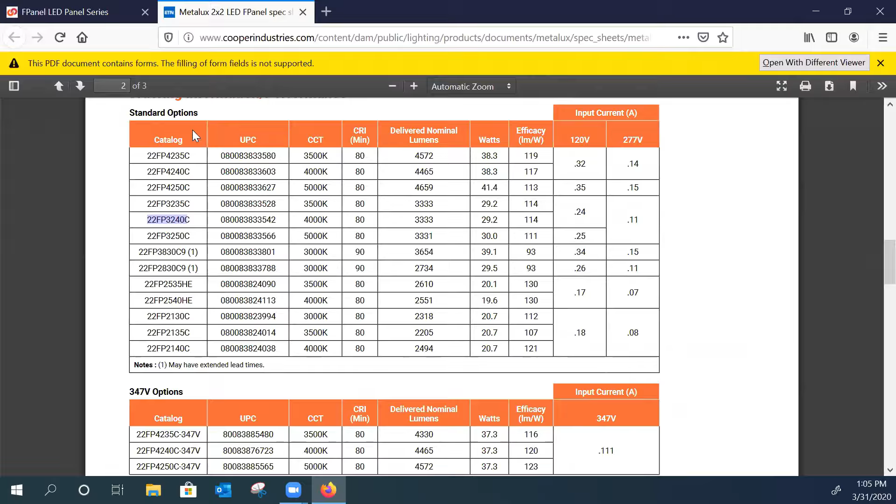So for today's purposes, we're going to do a layout utilizing the 22FP4240C, which is a 4,200 lumen, 4,000 Kelvin fixture. And then we'll also use the 3240C, which is a 3,200 lumen, 4,000 Kelvin. So I know what fixture I want to use. I'm going to go back to my fixture page, and I'm going to select the IES files.

So within this screen, this is going to be the same for any interior fixture as well. It's going to break down IES files by 1x4, 2x2, 2x4, and then ones with emergency. But if you notice, anything here that has a blue part is a link. Do not click on that. It's not going to hurt anything if you do, but it's going to open up the IES file in a text document that looks like this. If you're using Visual or AGI32, you could click and drag this link into that program. But we're not doing that.

So instead, anything that has a little calculator next to it, we're going to put a checkbox next to the fixture that we want to do the layout with. So going back to our spec sheet, we have the 22FP3240C and the 22FP4240C. So I'm going to click those, 3240C, 4240C. Again, you could select 1, 2, 3, 4, it doesn't matter. We're just going to select these two for comparison's sake.

So what you want to do is scroll all the way down to the bottom of the page, and there's this link here that says calculate the selected files. So I'm going to click that. That is opening a new screen on my computer.

And if someone could just type in the chat box and let me know that you see this thing that says Luxiflux Zonal, that would be awesome.

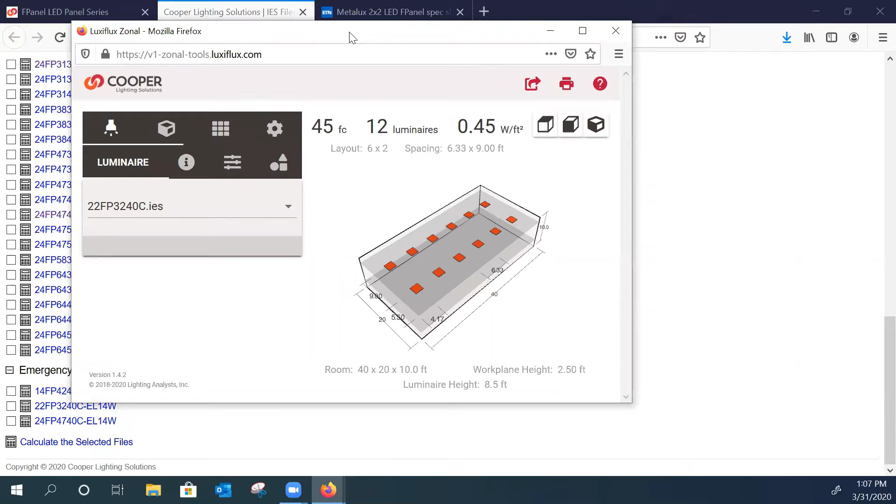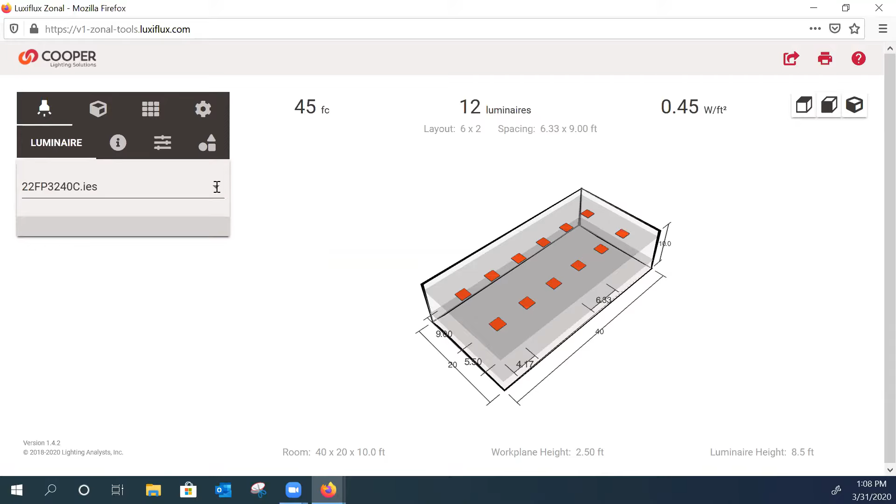So from this point, whenever we've selected those two files, this new window will pop up here. The IES file calculator is up now. Okay, so in this section, very quickly, we're going to run through left to right on the settings. The first button here is our luminaire, and here's where we can pick which IES file or which fixture we're going to use. We'll start with the 3240C. So that's telling us which file we're using.

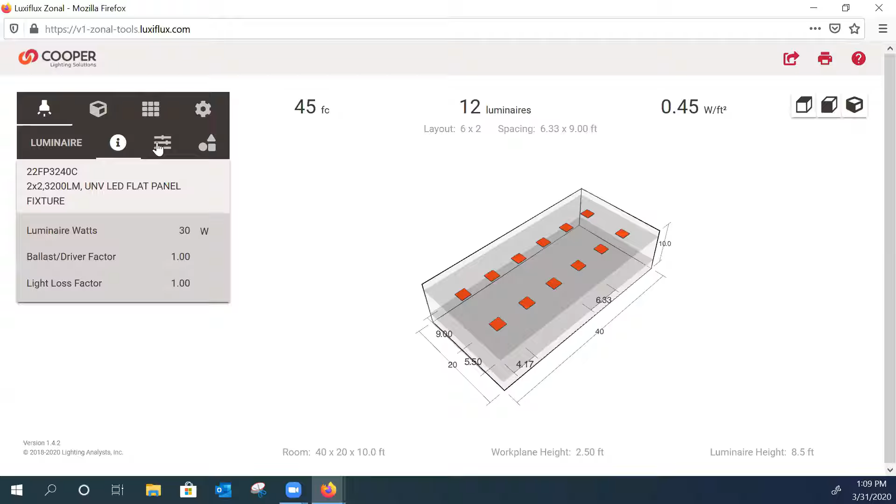The info button here is going to tell us about that fixture. It's 30 watts, it's 3,200 lumens, it's a 2x2, all that good stuff. The third button over here we're going to select, and this is our proration factor, also known as a light loss factor. We want to change that to a 0.9, and we want to use that for interior and exterior fixtures with Cooper. So changing that to a 0.9 gives us what we call a maintained foot candle level, not just your initial out-of-the-box foot candle level. So this is going to be your foot candle level over time, not brand new when you hang it up. So that's important.

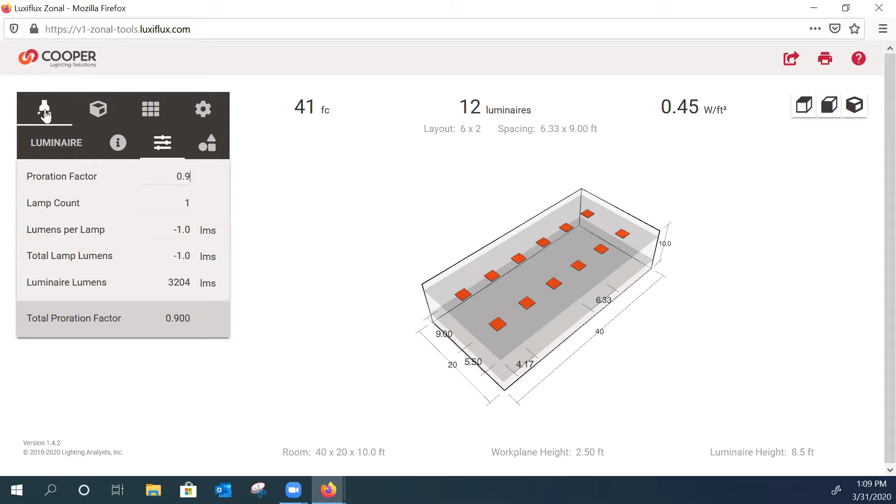So we've covered everything. The last button here for Luminaire is just going to be where we can change the shape of it if we wanted to. You could technically make it round, but we're going to leave it square. So next button up here is going to be a picture of a box, and here's where we designate our room size. By default, it's 40 by 20 by 10. We will make it, say, 30 by 30. We'll make a square. Now, one thing to note with this program, you can only do squares or rectangles. You cannot do L-shaped rooms or any weird shaped rooms. And it's just to give us a quick calculation of the estimated foot candles.

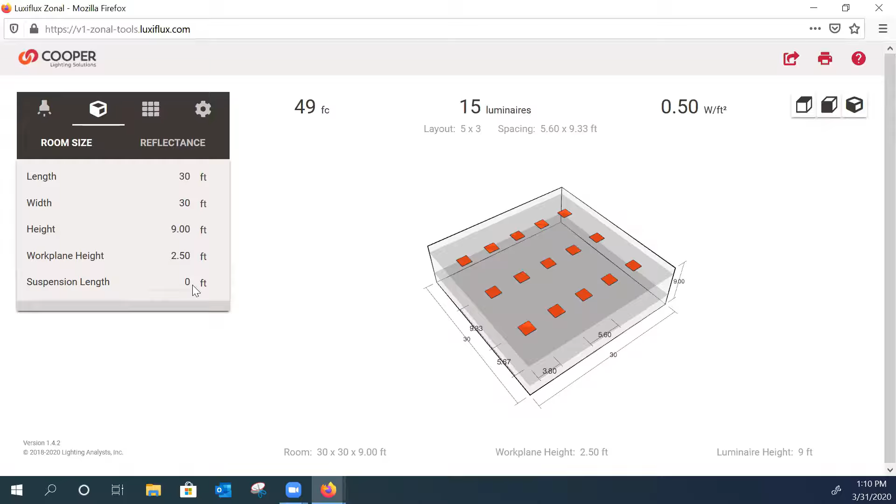So 30 by 30, the height is at 10 foot. I'm going to go ahead and make that 9 foot, which seems to be a pretty common height for an office. Work plane height here is going to determine where the foot candles are calculated. So if you were doing a gymnasium, you may want to put it at the floor. But for our purposes, we'll call this an office. We're going to put it at 2.5 foot, which is your common desk height. And then suspension length, if you were doing a high bay, maybe you put your ceiling at 30 feet and suspend the fixtures down 1.5 feet. But since we're recessed into the ceiling, we're going to put our suspension length at 0. So now if we look over here, our fixtures are actually recessed into the ceiling.

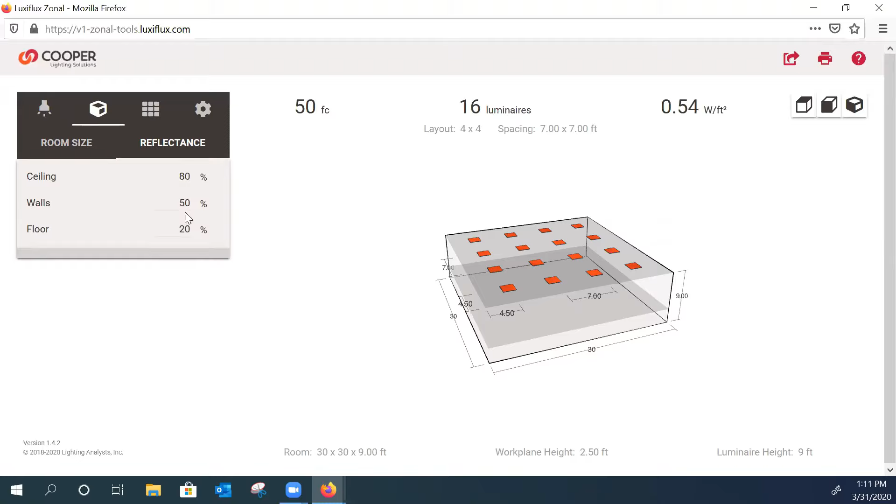Okay. Next, we'll go to the Reflectance tab. Again, we're just working our way left to right, and then left to right within each tab. So Reflectance, here's where we specify the reflectance of the room. If it is a typical office, 80, 50, 20 is kind of your default. This is a percentage of 0 to 100. So 100 is the brightest white that you have available, and 0 would be the darkest dark, completely black. So for this purpose, we're going to use 80, 50, 20 as it's defaulted. If you had a gymnasium with dark walls or a dark ceiling, maybe you reduce this to 60 and 30. Or if you had a really dirty warehouse, maybe you reduce it as well. So that's reflectance. We're still on the second box here, room size and reflectance.

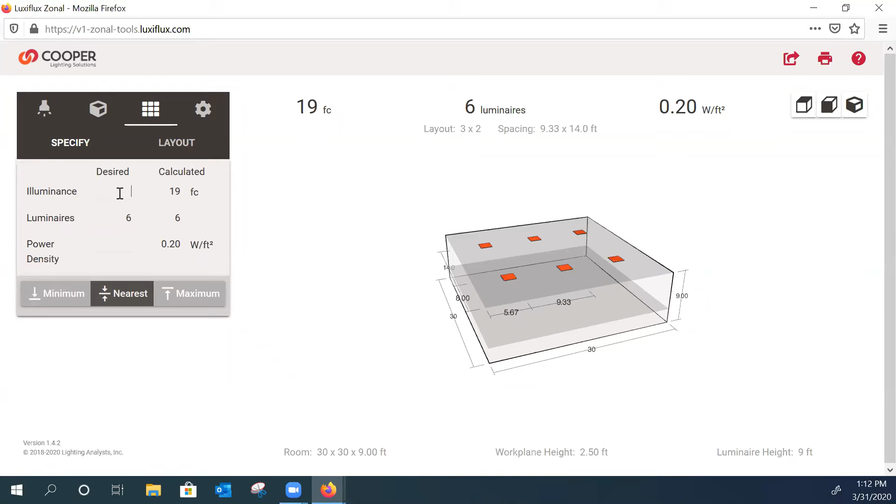Now the third button here is going to give us some options where we specify. Under specify, we can say how many foot candles we want, how many fixtures we want, or how many watts per square foot we want. We'll go with fixtures. Currently it's showing 16 fixtures is going to get us an average of 50 foot candles, but I'm going to change that to 8 fixtures. If you change it, it's going to make it the closest even or odd number of fixtures that are evenly spaced in the room. So this is showing us 9 fixtures is going to give us 28 foot candles. If we go to 6, we get 19 foot candles. So anytime we change one of these numbers, it's going to change the calculation on the right. So for now, for an office, let's say we want a 50 foot candle average. We're going to do that.

It's telling us we need 20 fixtures and it's 0.67 watts per square foot. Now here we're specifying, we say we want 50 foot candles either minimum, closest to 50 foot candles, or maximum. So right now 50 foot candle minimum, but if we hit 50 foot candle maximum, it's going to change the number of fixtures as well. Tell us, okay, the maximum foot candle levels in that space is 50 at that point. I typically leave it on minimum unless otherwise specified.

Okay, and then layout, which is the second little tab underneath the room here, underneath the specified tab, you can now change your layout. If you want to do, instead of 5 columns of 4, you could do 4 columns of 5, which is ultimately however you want to lay it out. You can also change, say 6 columns of 3, it's going to automatically change your foot candle levels here when you do that.

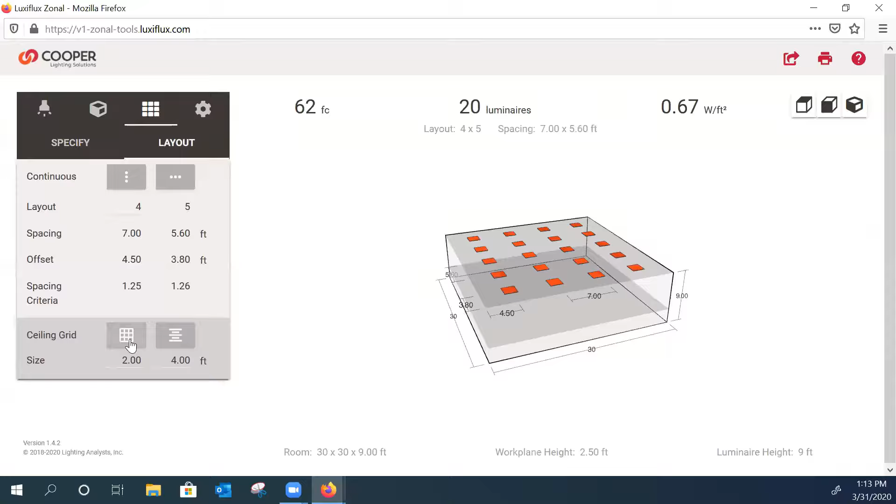So at any rate, we're going to leave 4 columns of 5, and we can also apply a ceiling grid if you wanted to. If you notice over here, it'll then center things in the grid. You could also center the grid on the wall. You could just take out the grid, center the fixtures, so on and so forth. Give you some optical differences there.

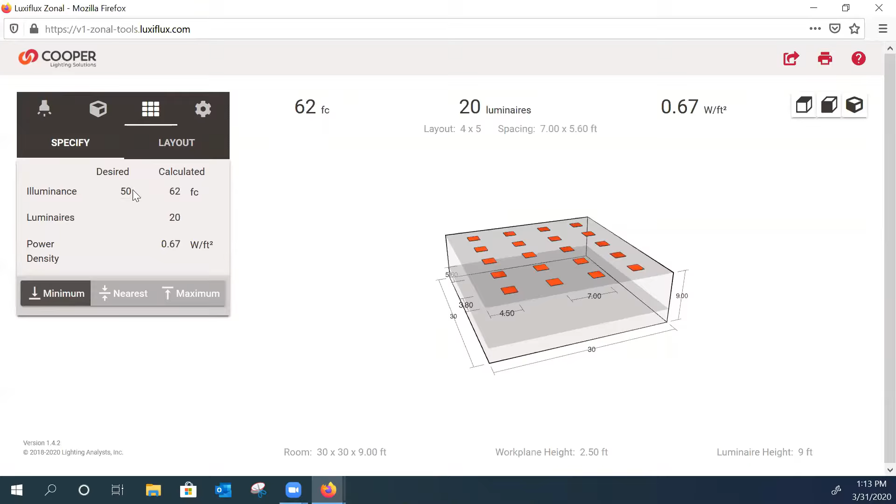One thing to note, your foot candle levels do not change. Your averages here do not change if you change your layout. So if we did 20 fixtures and we were going to do 20 in a row, 20 by 1, while it looks really bad, our foot candle average should stay the same. So we'll go ahead and go back to 5 rows of 4. So with that being said, again, we specified 50 foot candles minimum. It gives us 62. Here's our layout, 5 rows of 4. We can modify and change that.

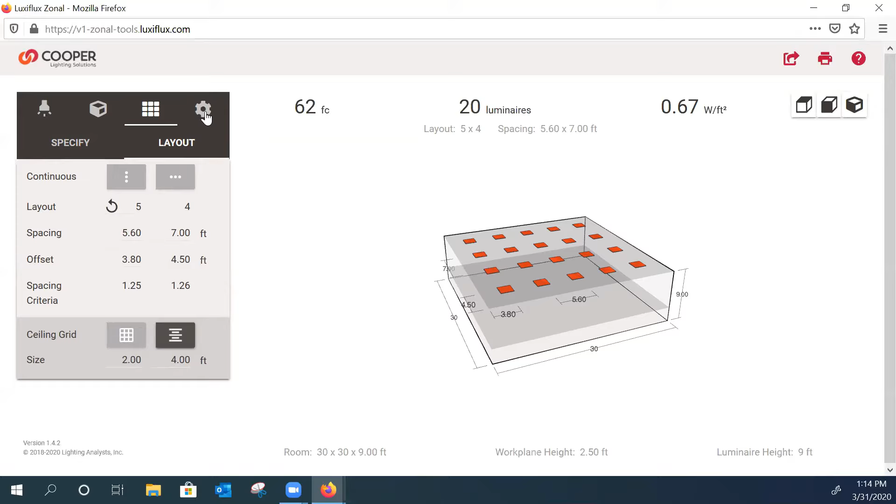The last thing to go to would be your settings here. And this is where you can change your distance from feet to meters. You can change your illuminance from foot candles to lux, or you could change your power density from watts per square foot to watts per meter squared.

Cool, so now that we've got that, a couple things I want to mention over here on the right-hand side. You have the ability to click your mouse and hold and turn this to whatever direction you'd like to view it at. You also have some presets here, which would be plan view, elevation view, and isometric. So with that being said, let me go back here real quick. So currently with this fixture we have chosen, we are at 62 foot candles.

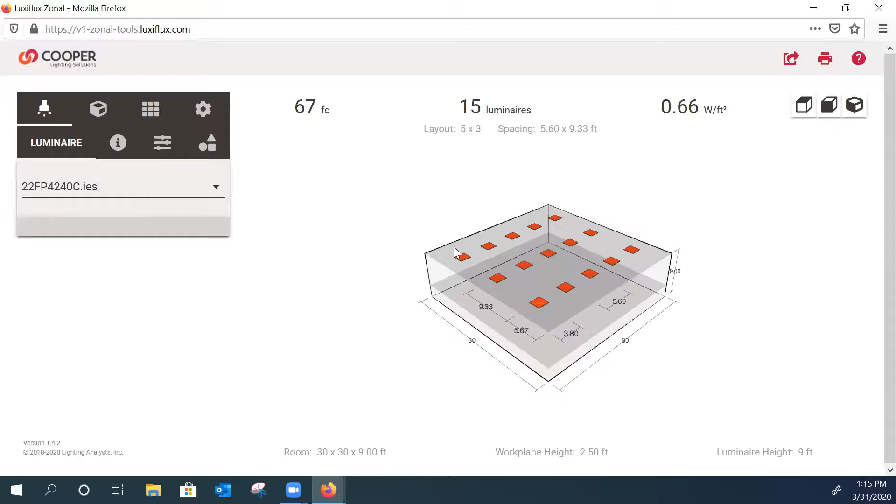There's 20 fixtures. Now if we go back here to our fixture at the top, go to luminaire, we can now change that to a different output if we like. So we'll switch it to the 4200 lumen just to see the difference. And when I do that, look over here on the right and just watch the changes there. So we'll change it to the 4200 lumen. And now to get a little bit brighter but close to the same foot candle levels, it's only going to take 15 fixtures. So you can toggle back and forth between 3200 lumen and 4200 lumens and decide which one you like best.

Then our last step is going to be to print this. You cannot save this within this program, and once I close this, it'll be gone. We'd have to start over from the beginning. So instead, you could hit share. Here you can email it to yourself or someone else.

The other thing I usually do is I go to print, and then here you can edit the information. So I can say Bill's office. I can type see plan, blah, blah, blah. All these fields are editable. So this is giving us all the information we just looked at on the previous screen. Luminaire watts, total number of lumens, size of the room, reflectance of the room, layout of the room.

And then it's also giving us up here at the top our average foot candles, our number of fixtures and our watts per square foot. Here on the right-hand side, you can click these same boxes.

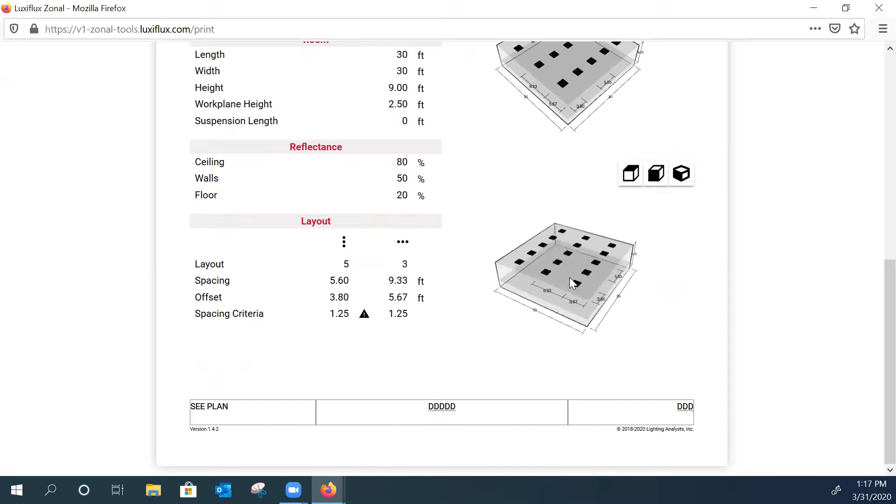So you can show plan view, elevation view, or isometric view on any one of these. Let's scroll down a little bit. You can also click and hold and rotate however you want as well. So once we've got it how we like it, then we just go to print, and that's going to open up a print dialog box for your PDF printer, or however you're going to print it, whether it's paper, PDF, whatever the case may be.

Now I'm going to go to exterior, and again, with exterior fixtures, I know the fixture I want to use, which is the Lumark Axcent wall pack. So I'm going to click on Lumark. I'm going to now find which fixture I want to use, which in this case I'm going to go to wall mount, and then the Axcent LED wall mount. You could do this with any of these fixtures.

Again, this page layout is the same as the interior. Tells us all the great things about the Axcent fixture. Tells us all the description of the fixture. We've got spec sheets here. We've got IES files, brochures.

By the way, for those who are on the line that are distributors or contractors, if you're looking for install instructions and for some reason you swear they weren't in the box and the box got thrown out, you can usually find any install instructions under technical information on the product page. Okay, so spec sheets, I'm going to pull up the Axcent spec sheet.

And again, because I want to figure out which fixture I'm going to use, I'm going to scroll down here to the bottom, and this gives me all my wattages, whether it's refractive lens or full cutoff, and all the good information. So we'll go here to our IES files for the small. So here we've got 1A, 2A, 3A, 4A, 5A. 6 is not on this page, so we'll compare the 4 and the 5. So I'm going to pick AXCS 4A and AXCS 5A. And I'm going to scroll to the bottom, hit Calculate Selected Files.

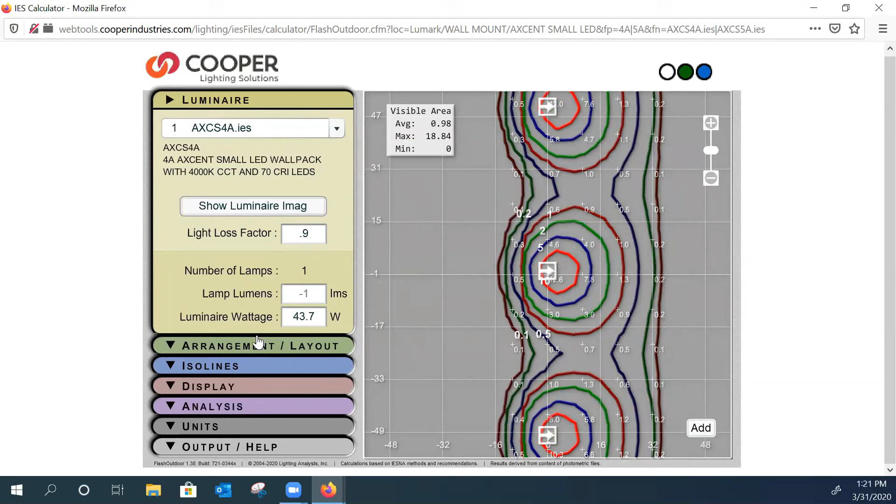Our next option here is arrangement and layout. Usually what I do is I start with a single fixture, just one fixture out on its own, because this is how we're going to be able to tell very quickly how much light this fixture puts out and where. So column 1, row 1, single fixture. Don't worry about spacing because we've only got one. We'll come back to that. Mounting height, let's just say this is over a man door at 12 feet. So we'll use that for comparison's sake.

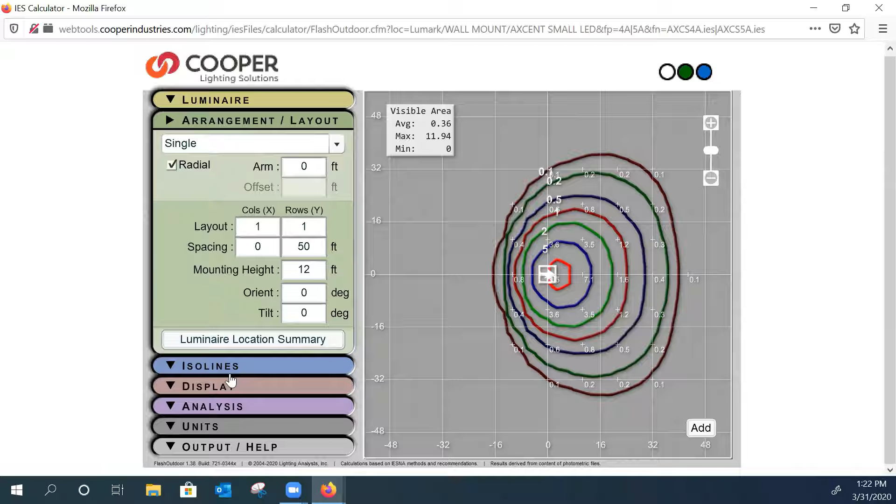So if we look here, this is the optical distribution of this fixture. All these lines represent a foot candle level. If you hover over them, it'll tell you 10 foot candles, 5 foot candles, so on and so forth. So what I'm going to do is go to those isolines, and I'm going to uncheck everything but that 0.5. And 0.5 is your typical recommended foot candle level for an exterior project from, again, a safety and security minimum foot candle level.

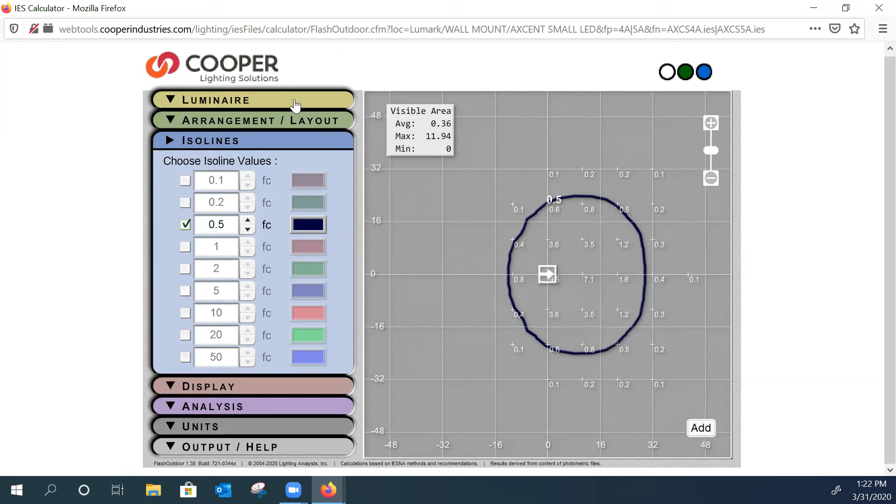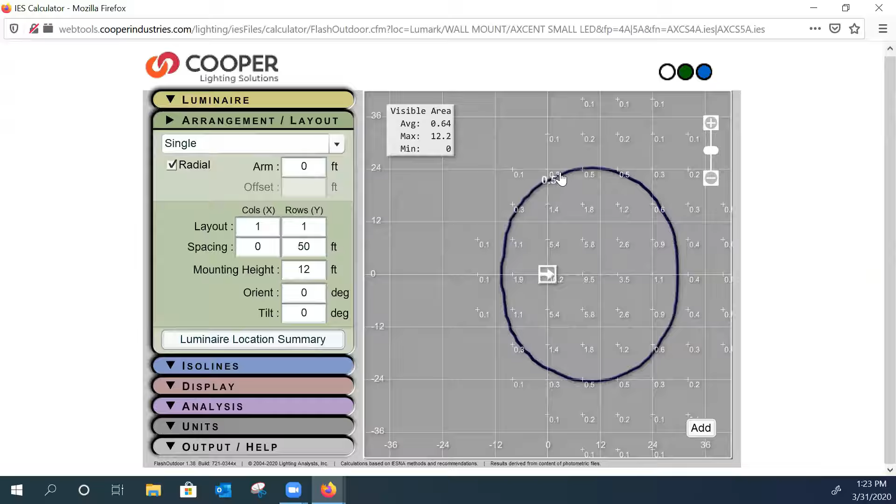So what I'm looking at right here is the fixture mounted at 12 feet, which is where we had it. I have a 1/2 foot candle right here. And judging by the spacing of these squares, and if you notice there's a scale here on the left, if I use my scroll ball on my mouse, it'll zoom in or zoom out, and it makes those boxes bigger or smaller. So this is a 12-foot square.

So just a quick glance is showing me, okay, this fixture at 12-foot mounting height is 12, 24, 30-something feet of forward throw. We'll talk about changing this scale here in a second. So 1/2 foot candle minimum is what I'm showing here, and here's my scale.

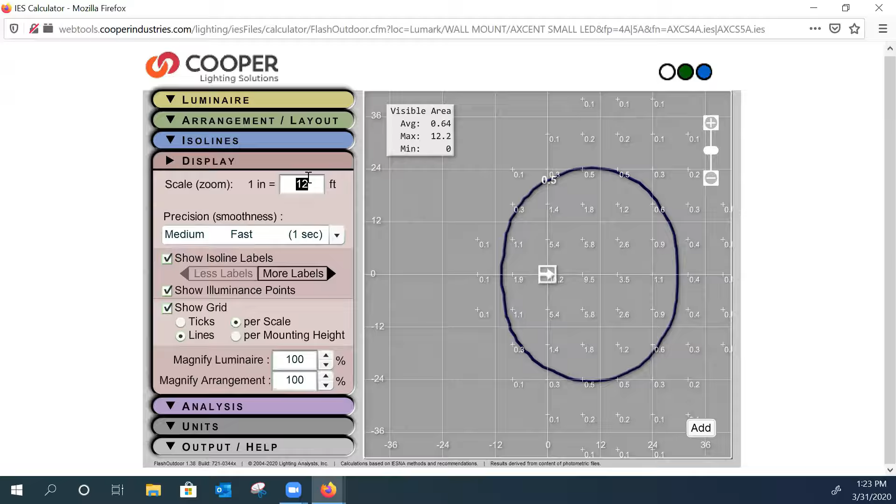Now, if I go down to display, my scale, here's an easier way to do it. My scale is at 1 inch equals 12 feet. I'm going to make it 1 inch equals 20 feet. So this is showing me at about 30 feet, I've got 1/2 foot candle. I'm going to leave it at that scale because it's easy for me to read.

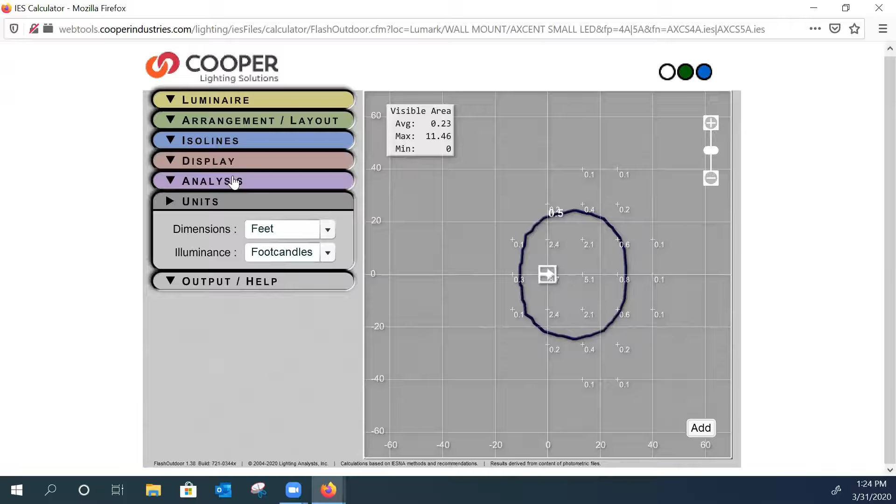We can go to analysis, and this is going to tell you your statistical areas, your average, your max to mins, all that good stuff. And then again, units would be feet and foot candle versus meters and lux if you want to change that. So that's giving us the quick calculation of our exterior fixture mounted on the wall at 12 feet.

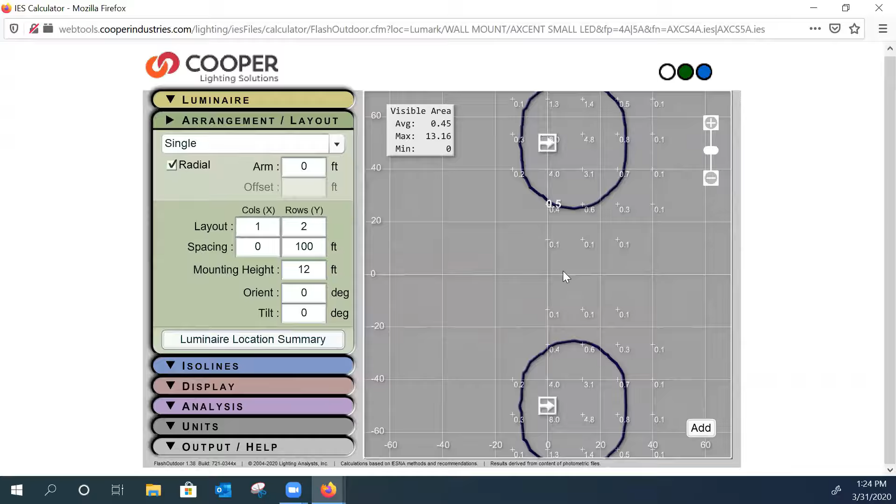Now, if I want to figure out how many fixtures I need or how close these fixtures need to be to maintain that foot candle level along my building here, which is this line, I'm going to go here and say rows 2, and it will show me, okay, here's 2 fixtures. They're spaced 50 feet apart. Maybe I can put them 100 feet apart. Well, no, that's not going to do it because my 1/2 foot candle minimum is gone, right? I'm down to 0 in between the fixtures.

So I'm going to change that spacing a little bit here to say 40. I think 50 was pretty good. 40 is definitely good. We're getting covered. Let's go to 60 foot and see what happens. So 60 foot, we still have a gap. So I'm going to say we'll leave them at 50 foot spacing, 12-foot mounting height. It's going to give us that 1/2 foot candle minimum with this particular fixture.

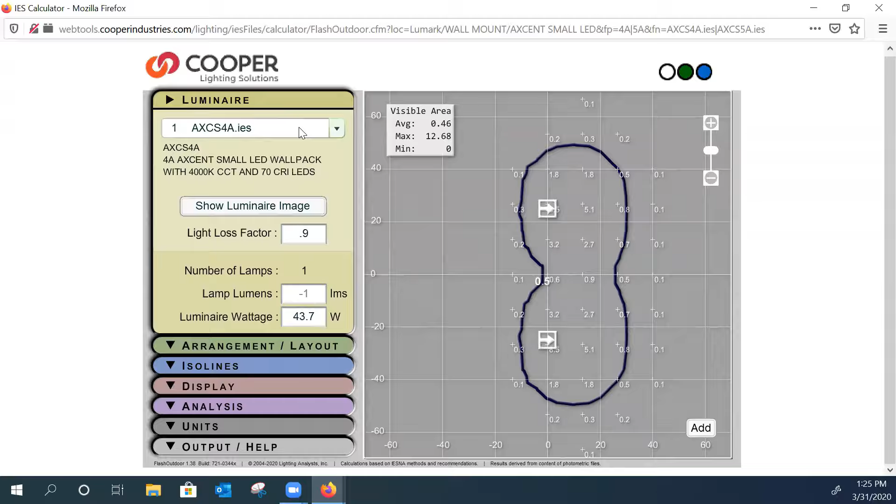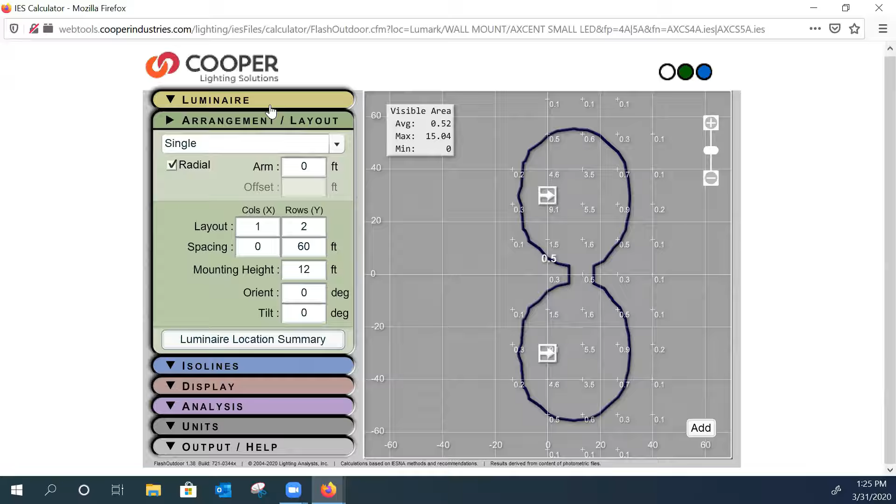Now I can go back to fixture here, and I can change it from the 4A to the 5A, and let's see what happens. So our distribution pattern got a little bit bigger. We're on 50-foot centers with the 5A still. Let's change that to 60 foot and see what happens. Now, cool, we're still connecting there basically at the wall. So maybe we can do 60-foot centers if we use the higher output fixture versus 50-foot centers with the lower output fixture. So let's leave it at that.

We'll come down here to output, and here's our options to print it out and give it to our customers. So if we go to print template, I always do preview first. That's going to give us a visual representation of what we were just looking at on our screen. And it also gives us the ability to put in title information here. Blah, blah, blah. You get the point.

Now I can print this to a PDF on my screen. You may not have a PDF printer, so maybe you have to print it to a piece of paper. Again, there's no way to save this. What I will tell you is do not X out of this until you're ready for it to be gone. If you want to go back to the previous screen, just hit close and it takes you back here.

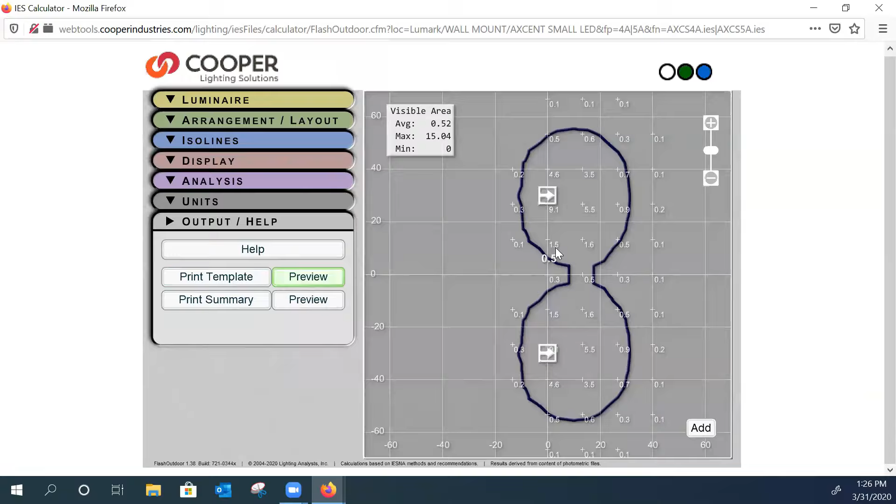So the difference between template, visual representation, and summary is just your XY coordinates and tilt factors. It still gives us the same information, but not nearly as easy to read. So I would typically go to template and then print it out from there. So that is a quick layout tool with exterior fixtures.